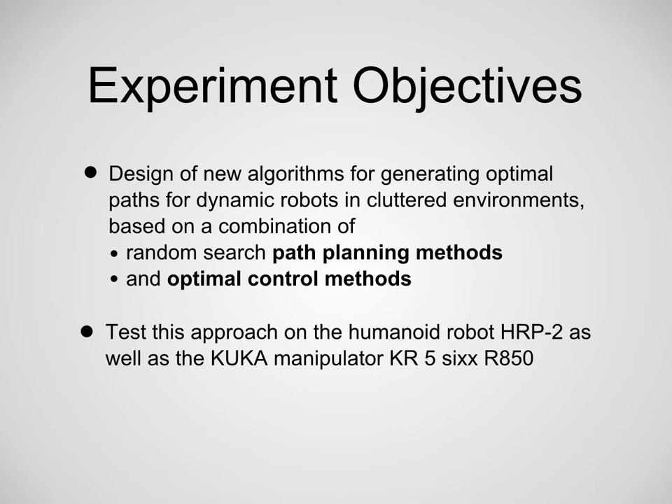In this experiment, we designed and tested new algorithms for generating optimal paths for dynamic robots in cluttered environments, based on a combination of random search path planning algorithms and optimal control methods. The methods were tested on the humanoid robot HRP2 and an industrial manipulator, the KUKA KR 5 sixx R850.

Path planning methods determine collision-free paths in very complex environments. After specification of an initial and goal configuration, path planning tries to find a sequence of postures for the robot that connect initial and goal configurations. LAAS-CNRS has long been specialized in efficient planning techniques and their application in robotics.

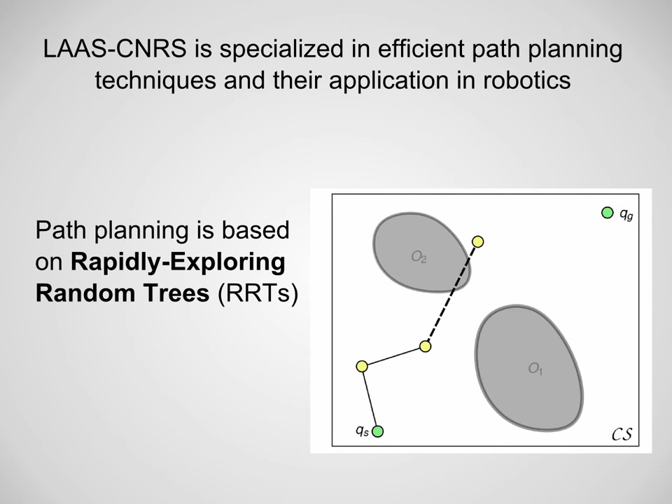In our experiment, we use methods based on rapidly exploring random trees. This sampling-based approach efficiently explores the configuration space and allows path planning to be performed in an efficient manner. As this is done randomly, the resulting paths are not necessarily intuitive or efficient.

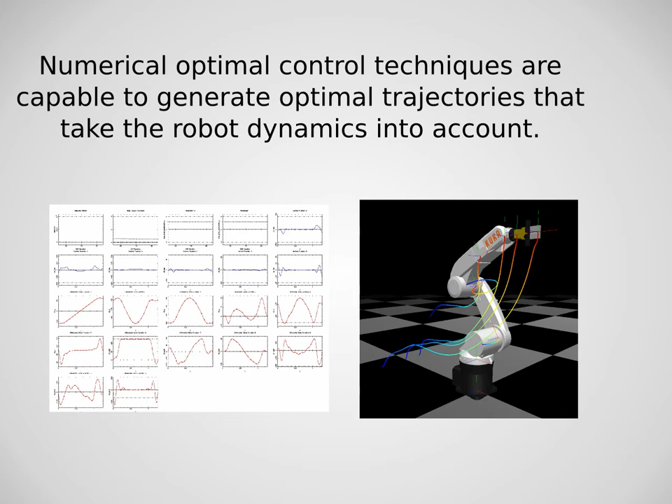Optimal control methods are capable of generating trajectories that take the robot dynamics into account. They optimize infinite dimensional functions and thus need special treatment when solving numerically. Efficient algorithms for the solution of optimal control problems have been developed in Heidelberg.

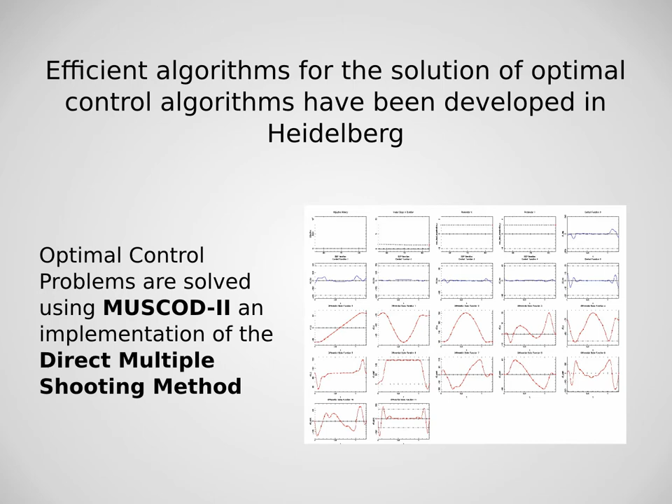We use a direct multiple shooting method to solve the optimal control problems. Depending on the problem formulation, the motions obtained by this approach are both efficient and natural looking. However, treatment of complex environments is very difficult to handle. Furthermore, constraints have to be piecewise continuously differentiable.

Achieved results. By inserting the robot dynamic model equations in the optimal control formulation, physical constraints such as balance can be enforced.

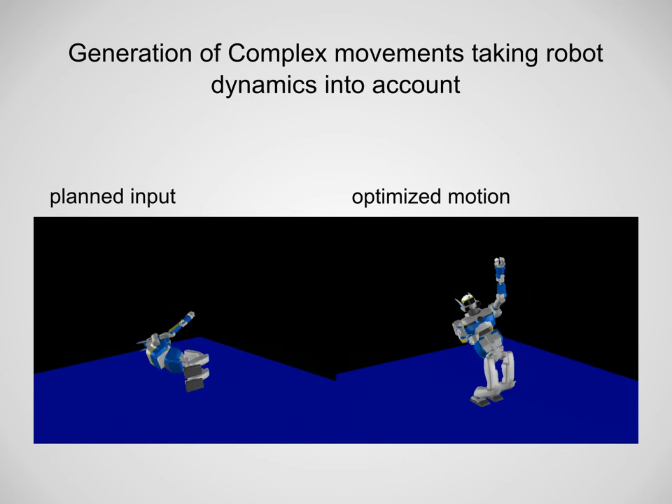In this project, we created a framework that combines path planning and optimal control methods. The path planner computes an initial collision-free path, which is then refined by the optimal control solver. The collision detection facilities that are available in the path planner are called from the optimal control solver to check for collisions.

The environment and geometric properties of the robot thus have only to be specified once for the path planner. Dynamic parameters of the robot are used in the optimal control solver to compute trajectories that exploit the robot dynamics. Additional constraints are specified in the optimal control solver, such as joint torque limits and velocity limits, and so on.

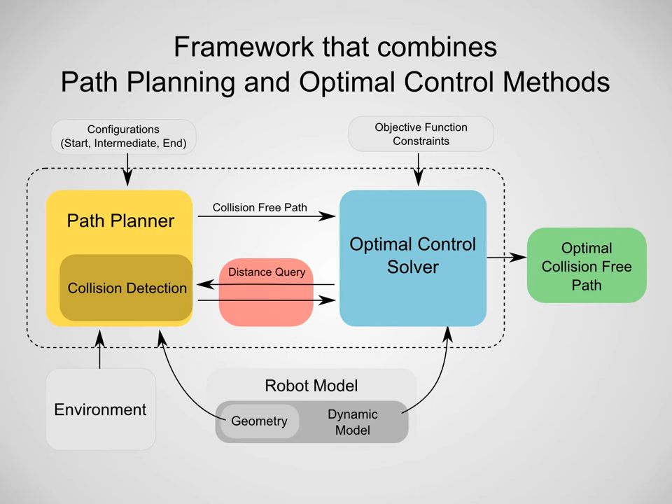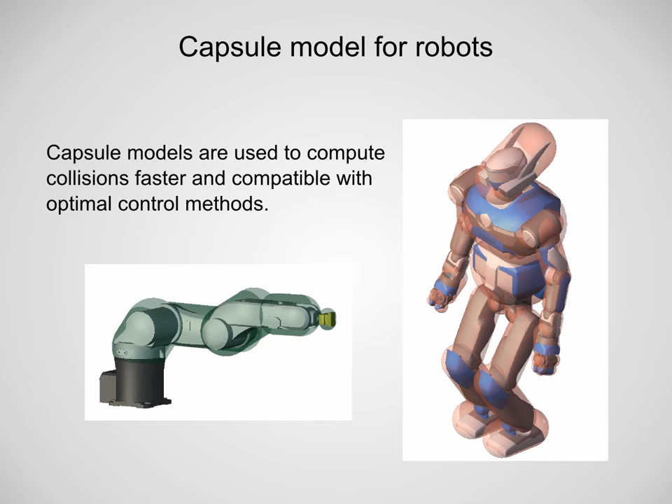Furthermore, we add collision avoidance constraints, which are based on capsule models. Capsules are generated automatically for each robot body and allow fast distance computations. Using capsules, distances are piecewise continuously differentiable and thus suitable for optimal control methods.

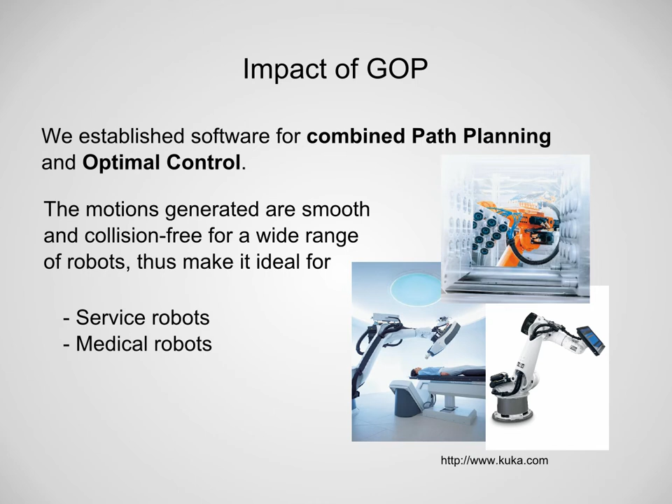In this GOP experiment, we established software that combines path planning and optimal control methods. The motions generated are smooth and collision-free for a wide range of robots, making it ideal for service and medical robots. Experiment demos.

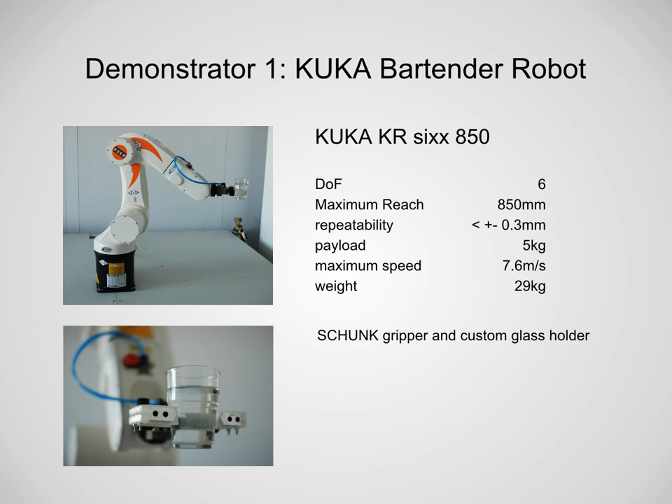In demonstrator 1, the KUKA bartender robot, we generated motions for the KR5-6R850 robot arm. It has 6 degrees of freedom and a maximum reach distance of 850 mm. It is equipped with a SCHUNK gripper and a custom glass holder.

The aim of our demonstrator is to swiftly move a glass with liquid in a complex environment without spilling the liquid and without self-collisions or collisions with the environment. To achieve this, we minimize accelerations of the glass along its local sideways axis and require a minimum acceleration along its vertical axis. Additionally, the motion is minimized with respect to time.

There are two scenarios. In the first scenario, we move the glass from a high position to a low position. A direct path is not possible and would lead to collisions with the environment. In the second scenario, we move the glass from one side to another.

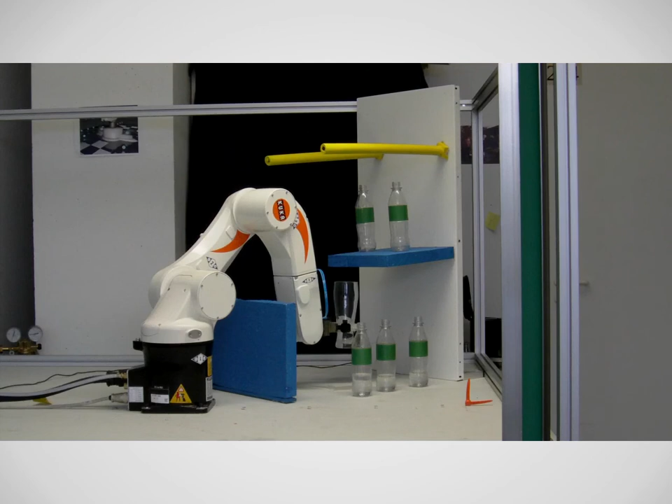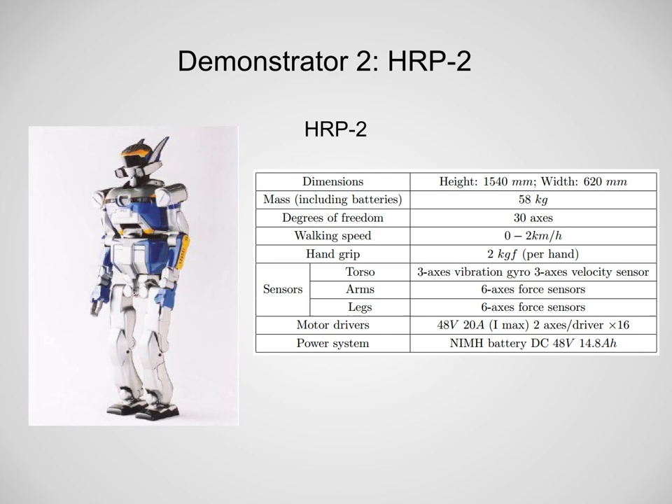HRP2 is a humanoid biped robot with 30 actuators, which makes it a highly redundant and versatile system. In our scenario, the sum of square jerks is minimized to produce smooth trajectories. Constraints on joint limits, dynamic balance, and collision avoidance are added in the optimal control formulation.

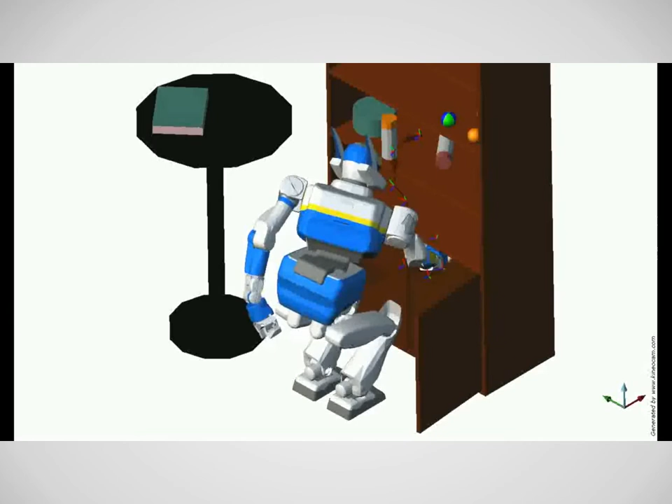In this scenario, HRP2 must grab a ball on the lower shelf and place it on the higher shelf while remaining balanced and avoiding collisions with the obstacles and itself.

A draft collision-free path is first found with the path planner. It is then used as an initial guess by the optimal control solver to generate a smooth, feasible, collision-free trajectory. The trajectory was successfully replayed on the real robot.